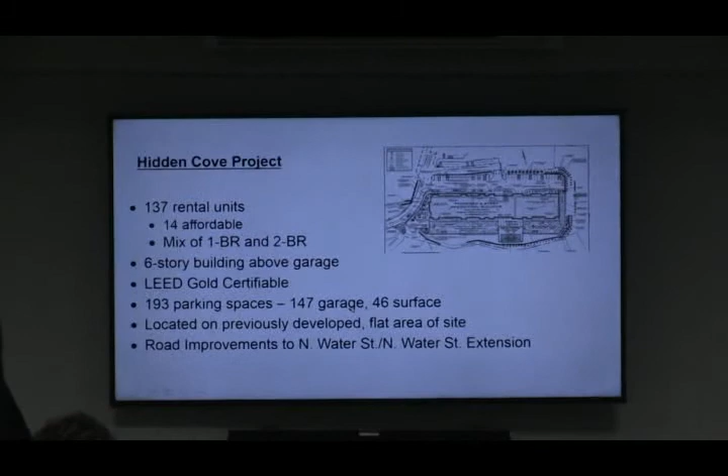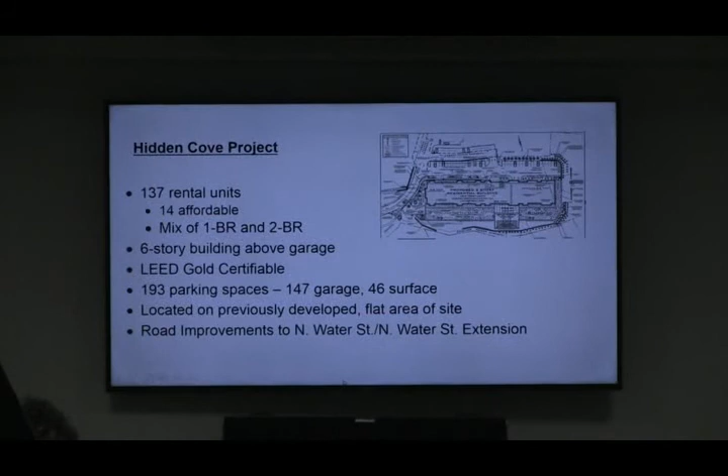We had clarified that in response to one of the comments that came up at the work session. LEED Gold certifiable - that was another issue that was resolved, I believe, at the last work session. We are providing the appropriate number of parking spaces and off-site improvements to the North Water Street and what's referred to as the North Water Street extension. And here's a snapshot of the applicable site plan.

The procedural status tonight is our 4th public hearing on the draft FSEIS. It's the 3rd public hearing on the site plan. Both the FSEIS and the site plans have been reviewed extensively by Kellard Sessions. We don't believe there are any open comments at this time. The EAC issued a consistency determination in conformance with the LWRP on August 6th, and we have also started the respective review processes before the BOT and the ZBA.

The BOT has jurisdiction over the special permit. The ZBA has jurisdiction over an interpretation that we have asked for, as well as 2 area variances. Those agencies, while they've started their processes, they cannot advance their respective reviews until SEQRA is completed. And again, the next step in that process would be deeming this FSEIS complete.

This binder, this document, on August 17th was our 6th resubmission of the draft FSEIS since April. Again, we believe we've addressed all of the outstanding comments by the relevant stakeholders. Just to highlight a couple or a few of the updates that were made in July and August of this past summer, LEED Gold certifiable has been clarified and confirmed in the document.

We have included all the language committing the applicant to recording a conservation easement against 1.2 acres on the east side of the site. This is here highlighted in the green, together with a commitment to work together with the village to have a connector trail from within the conservation easement to Crawbuckie Preserve. We have provided this drawing that was in response to the board's request for a visual analysis from views within the conservation easement looking west towards the river.

A question was raised at the last meeting about the sidewalk, noting that it does not extend all the way to Crawbuckie Preserve. So that has been now clarified in the document. The sidewalk, we have taken it as far as we can within our property. If the village wishes to acquire easement rights over Diamond Dairy or Clearcast in the future, then the sidewalk can be connected. That would be consistent with the village's trail plan.

And we have made that very clear in the document. We've distinguished that sidewalk on the west side from the trail connectivity between the easement on the east side of the property to Crawbuckie Preserve. So that has been clarified and distinguished in this latest draft.

Per the board's request, we've made it clear that the board prefers the rock cut alternative across from the castle property. You remember there were two grading alternatives, one that preserved the rock face, one that was all grading. This is just a short abbreviated version of the rendering that shows the rock face where the arrow is located. And there were a couple of other updates with respect to the road, including that Kellard Sessions has reviewed the road transition grading with respect to the adjoining properties.

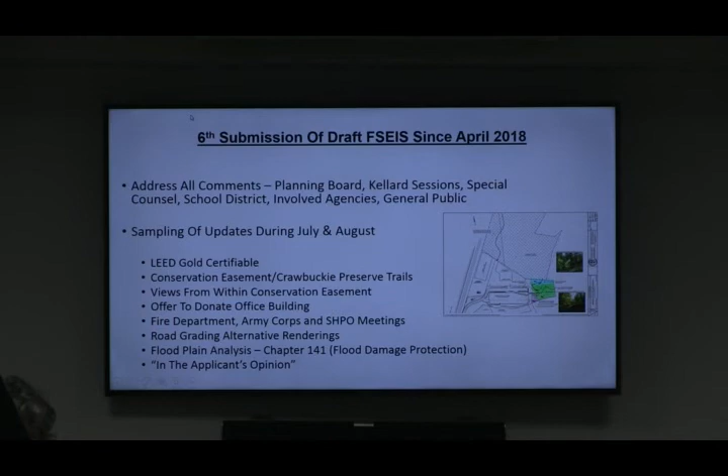And finally, again, there was language added with respect to LEED. There was a request that we specifically include the LEED language set forth in the code. That's now in the document together with the applicant's commitment that the LEED consultant would certify to the board both before and after construction that the LEED Gold certifiable standard is achieved.

We have summarized our discussions with the school district, including, Mr. Chairman, the one sentence that you would ask for with respect to the applicant's commitment to the district to continue working together with the district to voluntarily come up with a public benefit if that could be worked out.

We've clarified that river views would be preserved. We have described that from 10 North Water Street, yes, looking north, there would be a view to the top floor of the building, but all views from that residence looking west to the river and looking south and east would be preserved in their entirety.

So again, tonight we think we have, over the last 6 months, addressed every comment, answered every question. We ask the board to close the public hearings, deem the document complete. The legal standard your board is governed by is the rule of reason. We think we've satisfied that reasonableness standard.

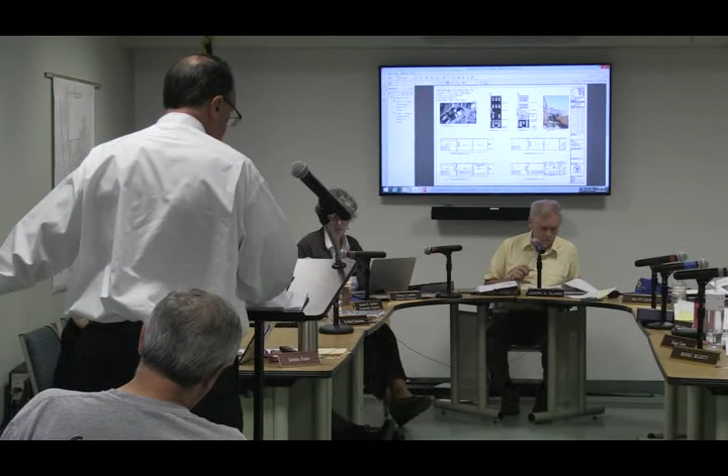So this is the back of the bar- are these the windows you were talking about? Yes, these two. I think Kai's talking about these two- the windows that are gonna be reduced. They're not being eliminated, they're being reduced. Okay, that's what I was asking- they're being reduced.

So I'm just curious, will those windows be looking into this dining area? No, those windows will have a view- if you see this section here. They will be above the roof line. Okay, now I understand your question. I thought you were talking about this window.

JB, is this wall the south wall, west wall, whatever direction it is, of Doka's? Yes, as far as I can recall, the entire west wall of Doka's is a bar back, I don't really recognize any- this is in the front, this is the rear, but it goes all the way to the back, and there's two restrooms back there. And that's the end of the building, right? No, it continues- I used to have my office there, so I know it very well.

It continues down the hallway, all the way in the back. There's an office, it kicks out between the kitchen and the bathroom on Doka's. And then you go even further back where Melita has her store currently. Eventually that's gonna be turned into apartments, and whatever that little office area is, I don't know whether it's gonna be an extension of Doka's or not.

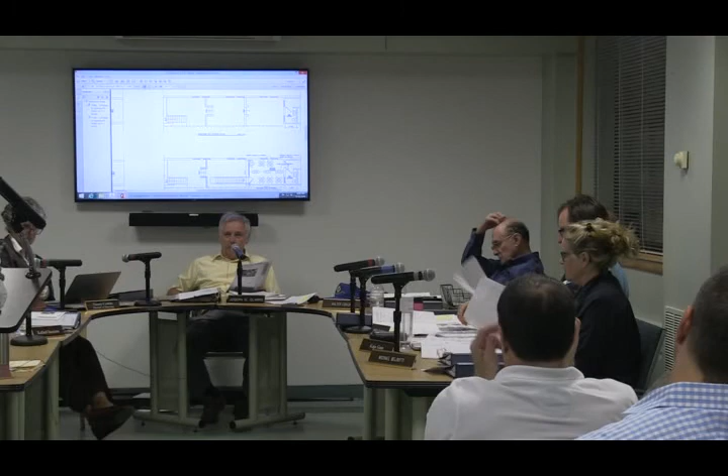All right, cool. Any questions? All right, so, are you good to go? Yeah, I'm good to go. I just don't want to shoot ourselves in the foot. Is there a motion to approve the plan? All in favor? Aye. Aye. Excellent, second.

Okay, Ossining Children's Center, 32. It's also planning. They were, well, we've moved right along. Avalon. Yep. No, I was helping you with that. He's got plenty tonight, but not yet.

Okay, Avalon Community. The applicant is seeking to amend the site plan conditional approval to trim and eliminate the...

Good evening, Chairman, members of the board. My name is Annie Klein, and I'm an associate at DelBello, Donnellan, Weingarten, Wise, and Wiederkehr in White Plains. I'm here tonight on behalf of Avalon, and joining me is Lindsay Romano from Avalon.

We are respectfully requesting that the 2012 Planning Board approval be amended to eliminate a condition that requires Avalon to provide a shuttle bus service from the property to the train station. This is because the service has been underutilized since it was offered, and ridership continues to decrease.

Avalon Ossining is at 217 North Highland Avenue. It contains 168 apartments in 4 buildings, including 17 affordable units. It is currently 96% occupied.

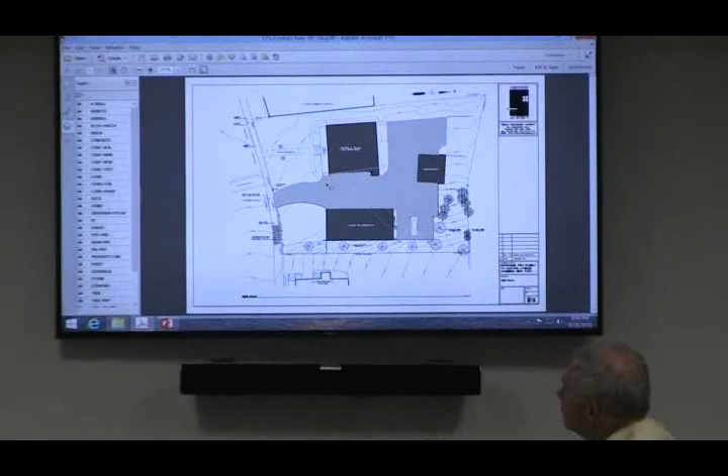We received a variance from zoning for the placement of the new structure, which is about 34 feet from the property line. We wanted to keep it aligned with the adjacent house, which provides this negative space, as architects call it—an open grass area with the driveway serving the two.

If we want to go, how do I get to the next page? So is this all on one lot or 2 lots? I don't know if you can see on this drawing, but there's 2 lots. The property line is right along here.

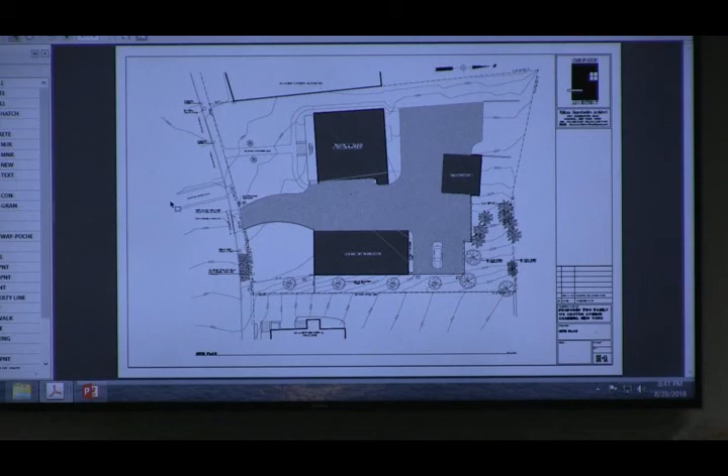So we are going to require an easement. I'm not sure if there's an easement now, but I doubt it—the driveway right now is in the vacant lot that serves the existing structure. So whether there is an easement or not, we're going to provide a new one along here. I believe that might be last month's drawing; the new drawing does show it, can I zoom in here? Yeah, the plus sign—yeah, I didn't see it.

The easement's not shown here, but it's basically going to be this whole driveway to this corner here, straight back. So this whole area here is going to be the easement, because the people parking here are going to have to back up and come out, so they're going to have to use this portion as an easement.

Sure you don't want to do this one? Is there a reason why that has to be so much pavement? Well, as I mentioned, I'm going to do it this way. Unless I can find the next page. Unless this is where... Yes, that's why I want access to the garage.

Floor plans, Jamie. There it is. But it's not this, because this is only one page. Let's go to the floor plans. 1B.

The driveway's basically along here. This is the ground floor. First level is going to be the two-car garage as you approach, with the driveway coming along here. So the reason for that big driveway is to provide backup space for these 3 cars. There's 2 cars here, a 1-car garage, and then the outside parking is back here.

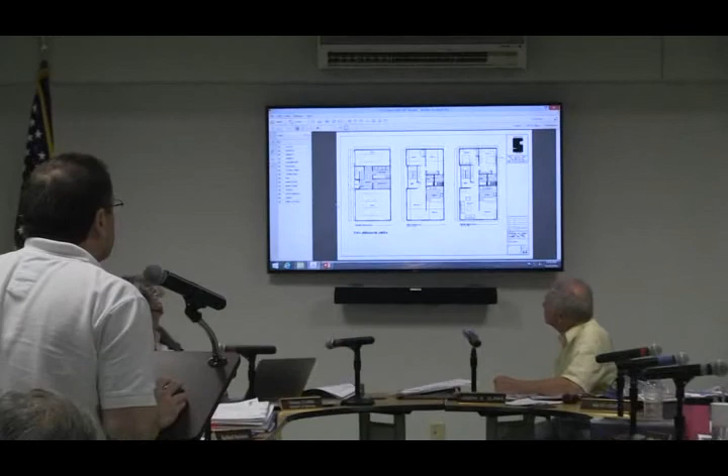Living space on the one house will face Croton Avenue. Both layouts are the same, second and third floor, so there'll be a total of 3 floors - ground level, second floor, and third floor. Both units face the same direction - the living spaces face the front, Croton Avenue, and in the rear there are 2 bedrooms. They're stacked, so you have the garage level, and it's an identical layout basically for each unit.

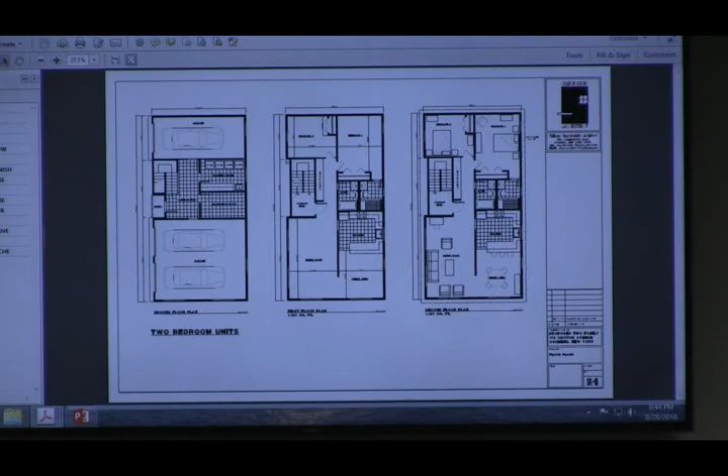And the entrance, if I can get to the elevations. When do I minimize it? Close it out. Exit out, the exit. I can't see that far. Okay, right here. Up. There we go. All right.

So the entrance is in the long direction, which is this. The lower level, the ground floor, is going to be all brick faced with vinyl on the rest of the structure above. The main entrance is here. These are the 2-car garage, which really services the ground level and the first floor, and the other car garage is here.

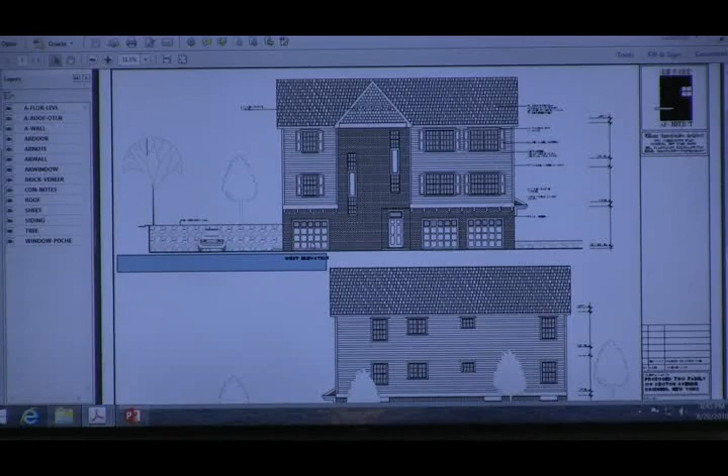So that's the entrance, which is facing the existing structure opposite this elevation. This faces the adjoining lot east of the property, right before the pizzeria. And the elevation that's facing Croton Avenue is this - so this faces Croton Avenue, and this is the rear elevation.

Because it faces Croton Avenue, we added a few more details with the metal awning canopy over the large windows. This is NC2 zone, so one reason we provided the 2-car garage in the front of the property instead of the rear is in case in the future this owner or the next owner wants to convert it to a commercial space. It's large enough, and we can provide entrance to the front here.

Just right, with no parking? There would be - we would have to provide more depending on what the use would be, but we do have some more spots. I just have, there's nothing to do with the site plan, but why did you decide to put essentially 2 flats and not do a duplex?

Actually, I did a duplex design, and the owner preferred this. It worked, other than I think it was only possible to get 1-car garage for each unit, just because of the layout and the space in between. He preferred 1 on each.

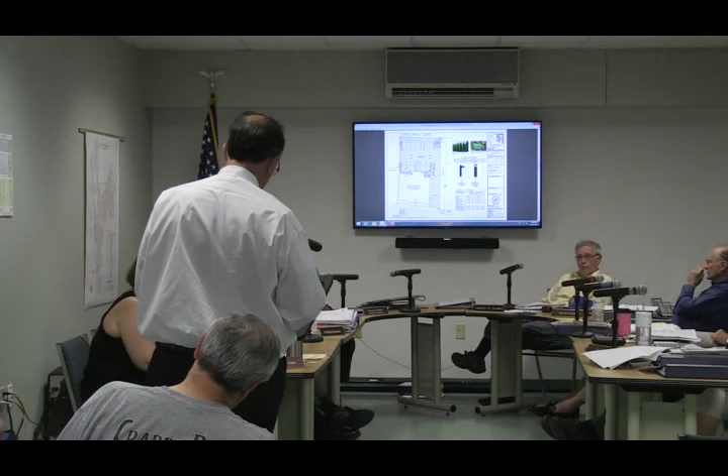I'm just saying, it's a long travel you're gonna have. You haven't demonstrated that you can't do it without a variance, without parking. Well, I was basing the design on the fact that we have two uses where the parking is not compatible. Oh, that's not true there. The market... Absolutely, I can't imagine a different place, but go ahead. Let them, I mean, that's a Zoning Board of Appeals decision. That's not mine, but I don't think you've convinced me.

Well, if you go back... yeah, I don't know how we drill into that here, but let's just say you're proposing two alternative site plan parking layouts. Yes. And one produces more parking spaces than the other. Yes. But one of the notions is, does one of them make better planning sense than the other?

Yes, but they don't necessarily align in that way. The one that produces the most spaces isn't necessarily the better planning solution. Is that right? They each have some issues. No, neither one is good planning because they both drive variances. So you gotta start there. So now it's which one is least impactful. Right.

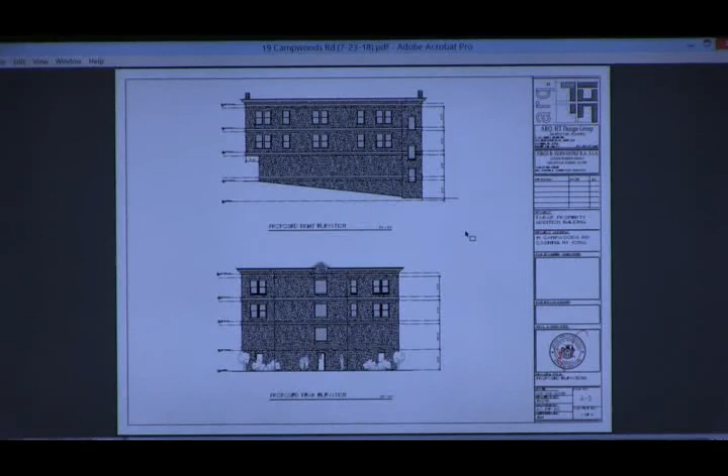Just go back one. Yeah, that's plenty. You got the ground floor, but it's like the second story here is just completely blank, bare. Well, I think it's fair to say, wherever this goes, it's not going to be that.

But to me, I don't know how to characterize this in very specific terms, but I don't think our zoning and our comprehensive plan has caught up to this idea. Maybe we could sift through it and find supporting language. But I do think, for me, and I live in this neighborhood, and I walk by Lipton's almost daily, this is an interesting idea at a lot of levels, and I think it presents some interesting opportunities to clean that area up. And I'm not sure what the answer is on the density.

As you were introducing this idea, I thought it was good. When you got to 8 units, I was like, I don't know if that's the right number, or if that's the economic tipping point for your applicant. But maybe 6 is the right number, and that lends itself to making the parking work better and the building massing more friendly. I don't know.

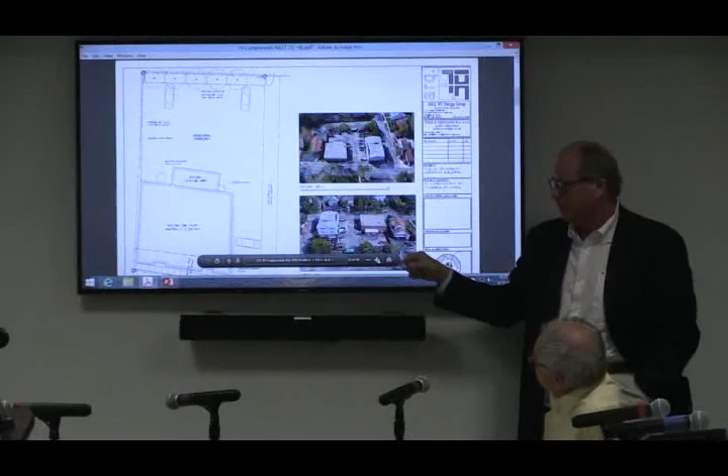The one thing I've been meaning to talk about, if you go back to your initial photographs, right there. I walk by this all the time, and I can remember the statement: as soon as the asphalt plant's open, we're going to complete our parking lot and line it off in the manner approved in the site plan. Was that 3 or 4 years ago? The asphalt plant has opened and closed 3 or 4 cycles, and that has never happened. True, right.

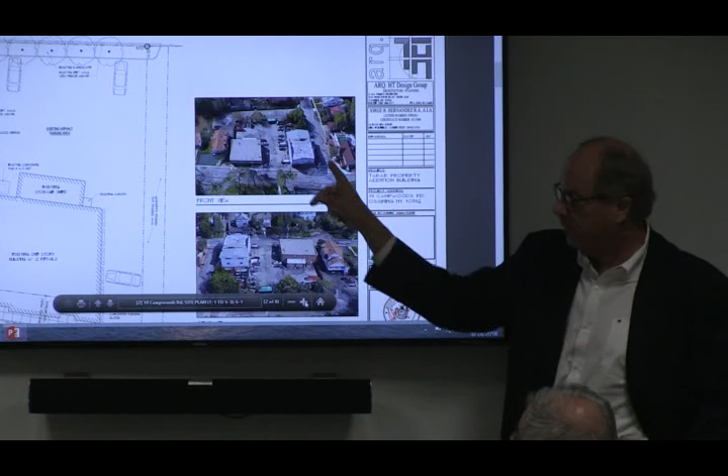So part of the parking that's still discombobulated in this neighborhood, which the neighbors came and spoke about, has never been accommodated in the way it was approved and promised by the owners of the school. I think that bears minimally on this application, but it does have a bearing on the whole.

So, that being said, I will go back. No, don't go yet, you have an audience. I'm glad. I'm gonna guess that everybody here isn't here to listen to what's coming up next. So the board is good, we'll open it up to the floor. Just give your name and address and tell us. Ask the board the questions and we'll try to get you an answer. But you may have to go there.

My name is Tom Wojciechowski, I live at 81 Stone Avenue. I have a couple of concerns. The building is very old. One concern is the weight that's going to be added onto it. Will the foundation and existing building accommodate it? I've lived here almost 50 years, and that building was here long before me. So will that foundation accept the weight of these 8 apartments?

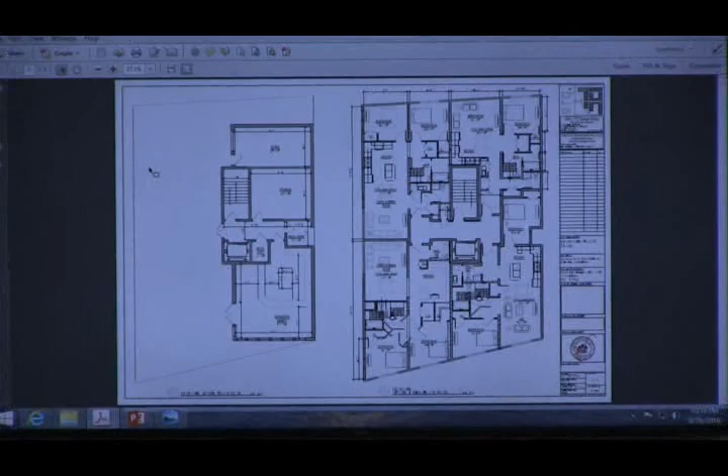So the idea again, this is a modular building. Downstairs we're gonna have a small bakery. It's not owned by the Bakers, it's the Morgado Bakery.

I can bring some information, she does mostly cakes, so it won't be as much. You already have a tenant? Yeah. That's actually the owner's wife, so that's a given.

The units, we worked out to all be modular units. Again, it's kind of the same, but the process here is working out the site and meeting all the zoning criteria. It's just going to be the environmentals on the site.

So when we see this at the formal process, since we have colors that you can make, can you color in each unit so we can see which units are what? The units are approximately 800 to 900 square feet each.

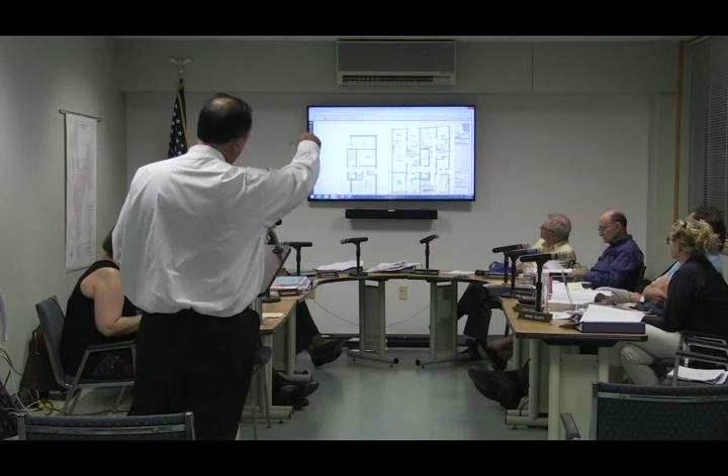In the units, the building is adjacent to the property line, so these two apartments on this side we had to be creative with, trying to fit the windows in. On the site plan, were you saying you're gonna retain some of those trees there? I doubt that you can. No, we never could, we've replaced it because you can't retain it.

Have you actually thought about these as accessible units too, with wheelchairs in there? Yes, and we have an elevator. We've been going through some of this multifamily requirement that they all had to be Type B units, meaning they had to be ready to be handicap accessible or converted to handicap accessible.

Well, we look forward to seeing what this thing's gonna look like. Universal design doesn't mean handicap necessarily. I didn't say that. I want to know what this is gonna look like on the outside. Me too. Yeah, me too, I feel the challenge.

All right, it's 10 o'clock. Anything else you want us to know tonight? Can you leave that maybe? No? Good, I think the next round we'll have a formal seminar, when we can have a formal seminar.